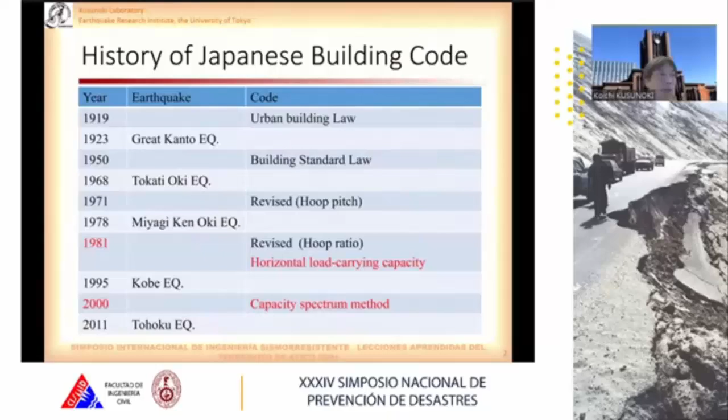But in year 2000, we added another option for the structural calculation, which is called the capacity spectrum method, which can predict the response of the structure explicitly for structural design. This is the basic concept of the capacity spectrum method.

Then at the same time, we can calculate the demand curve, which could be the code requirement. This demand curve shows us how much strength and how much deformability is needed for my building.

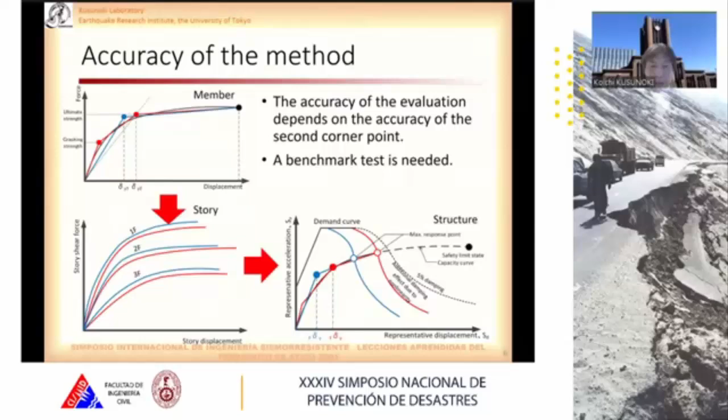And also we need a benchmark test to confirm the accuracy of the capacity spectrum method. So that's why the Ministry of Construction decided to launch a national big project starting in 2018 for 3 years, called the Building Standard Provision Promotion Project.

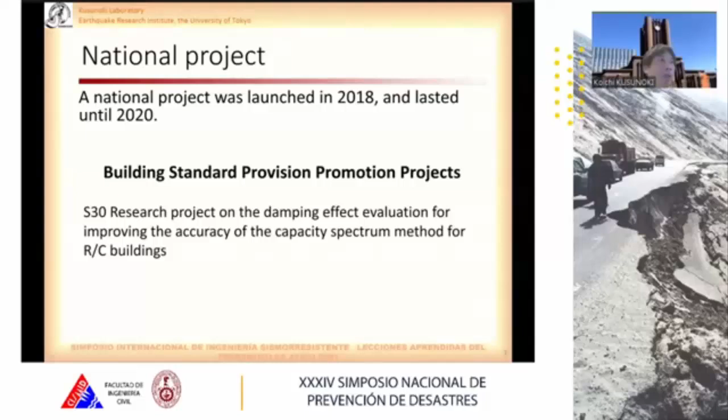Now the Ministry of Construction has a certain budget to conduct this kind of project every year. The number of the project is S30 - S means structural issue. The title of the project was a research project on the damping effect evaluation for improving the accuracy of the capacity spectrum method for reinforced concrete structure. It's a quite long name, but anyway, this was the official name of the project.

Then the activities of the project were to develop a new function to evaluate the second corner point of the reinforced concrete members. Then we started developing the database of the experimental tests.

Then we found that this kind of very deep depth and very narrow width columns cannot be found in the database, but this shape of column is nowadays quite common in Japan. So we decided to conduct some additional experimental tests with this kind of columns.

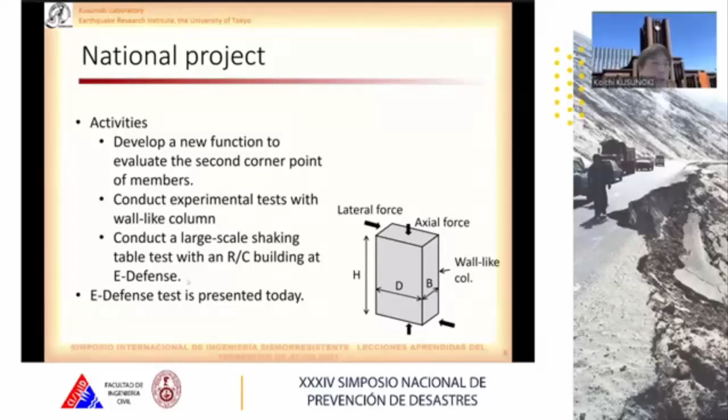Then finally, we conducted a large-scale shaking table test at E-Defense, which I would like to talk about today. Since the project is quite big, the research group is also quite big.

The PI from the academic field was Professor Teshigawara, an ex-BRI researcher. He has now retired from Nagoya University, and right now he is a professor at Chubu University. Then I'm here, and we have some researchers from BRI as well.

Because the project itself is quite big, we asked so many people to join and conduct other research with the same specimen. We decided to instrument some sensors to develop a structural health monitoring system. This subgroup consists of ERI, BRI, and some other private companies.

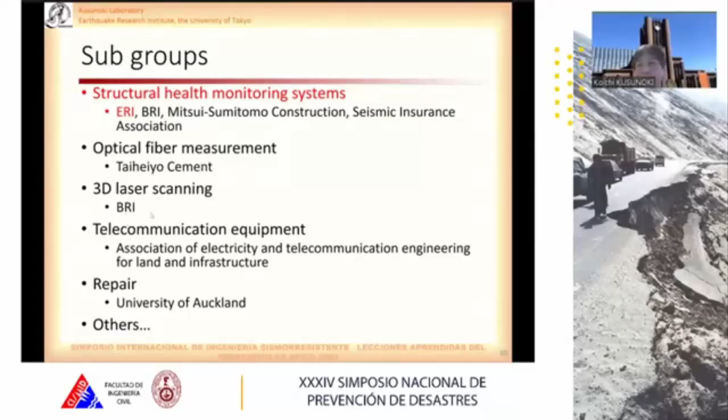We also asked a company to develop an optical fiber measurement system. BRI conducted 3D laser scanning of the whole structure, and so on.

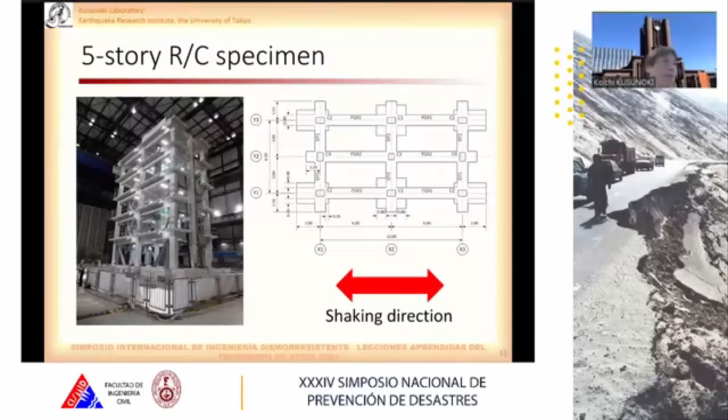So this is a specimen, almost full scale. The shaking direction is just one way, in the two-span direction. This Y direction was not shaken. It was a two-span, two-bay structure, and the span length was 6 meters.

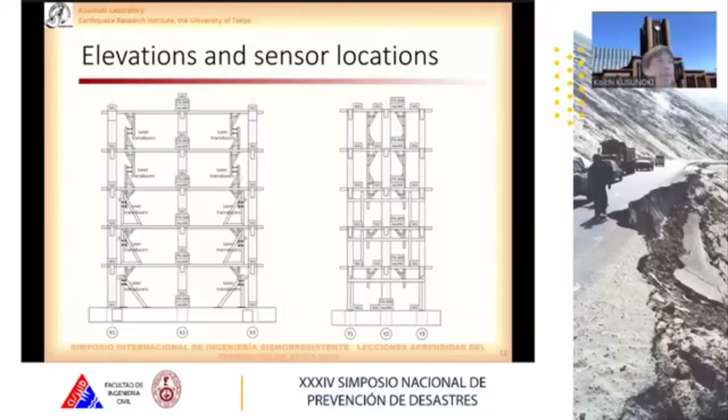Then this is the elevation. Since we were not planning to shake the specimen in the Y direction, the span length of the Y direction was quite small. We put so many sensors and accelerometers at the center of the specimen, and also the corner of the specimen, and also applied laser transducers to measure the interstory drifts, like this.

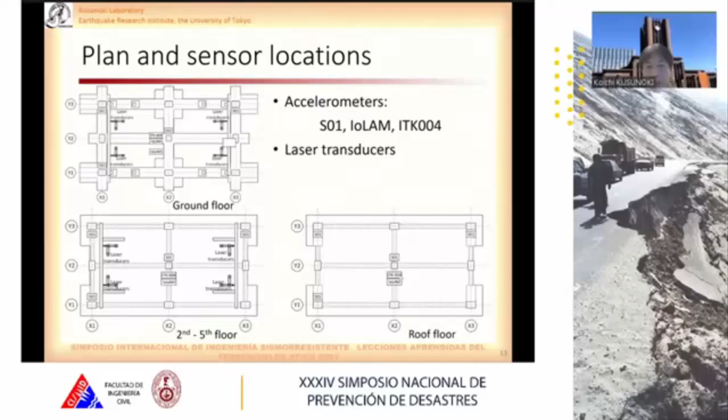One is quite high accurate sensor. Then one is quite low accurate, but quite inexpensive. It costs only $60 for 3 directions. It's quite cheap. So we put several sensors to confirm what accuracy is required for the structural health monitoring system.

For example, this one, you can see the difference of the sensors. S01 was provided by the E-Defense facility. This could be the highest accuracy, and the measurable range is quite wide. The second one is intermediate. Then this one is the cheapest.

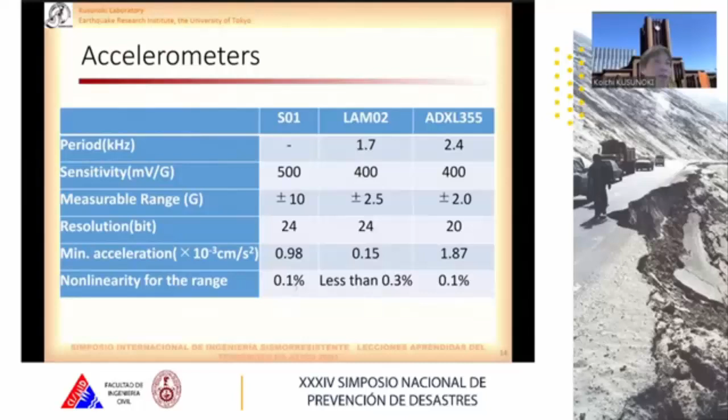Then you can see the minimum measurable acceleration. It looks quite high. Oh, actually this one was the best one. You see the accuracy is the highest here, but the linearity, non-linearity, is a little bit larger than S01. We applied anyway 3 different sensors.

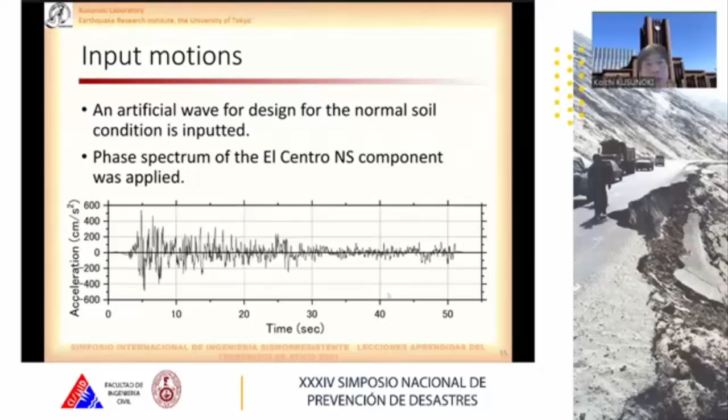So this is the input motion. We decided to input this wave, which is the artificial wave usually applied for structural design in a practical field. The phase spectrum was El Centro NS component. Then it lasted, the duration was about 1 minute.

So this figure shows the response acceleration of the input motions. Firstly, we inputted 60% of the code requirement to see the behavior in the elastic stage. Then we inputted the code requirement level and increased up to 125%. Then we inputted this level again to see what will happen during the possible maximum aftershock.

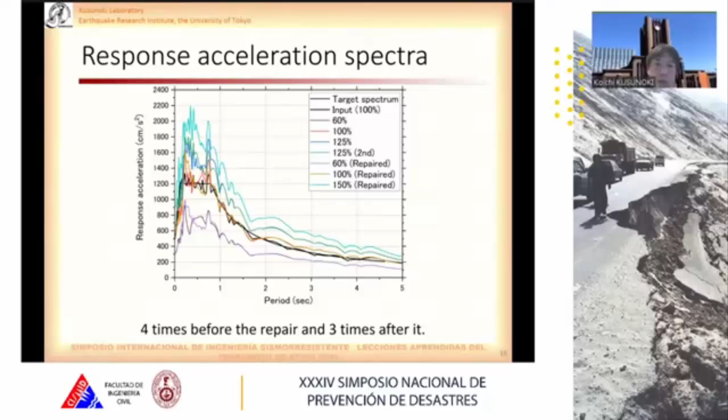Then after this test, we retrofitted, actually repaired the specimen. Then we shook it again, like this. So we inputted input motions 1 through 7. Here you can see the spectrum of the code requirement. Then for the 100% level, the response acceleration agreed reasonably with the code requirement.

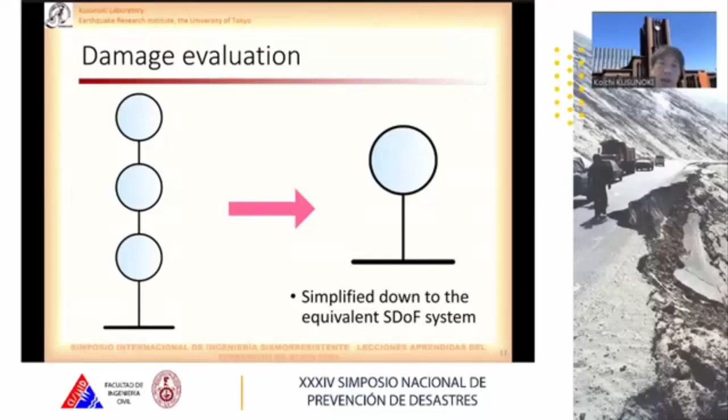So how to evaluate the damage? We decided to apply exactly the same as the capacity spectrum method, which is an option of the building code, added in the year 2000.

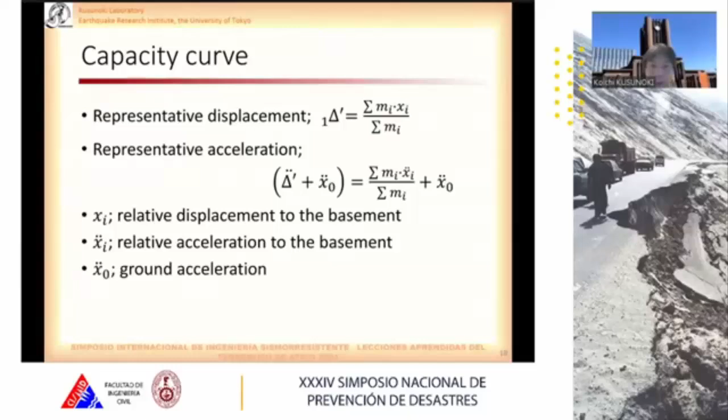So here you can see the functions to calculate how to simplify down to the single degree of freedom system from the multi-degree of freedom system. That's quite an easy function to calculate the response of the single degree of freedom system. I don't want to touch on these functions in detail, but anyway, I would like to say the simplification is quite easy.

Then with a measured acceleration, we can calculate the capacity curve directly from the measured acceleration, but only up to the maximum point, of course. We couldn't measure this region, only up to the maximum response point. So we need to predict the behavior after the maximum point, like this.

Then with the mode shape, measured during the shaking, and the safety limit state previously decided before the test, we can evaluate the damage level of the building like this. In this case, the damage level is evaluated as level 3.

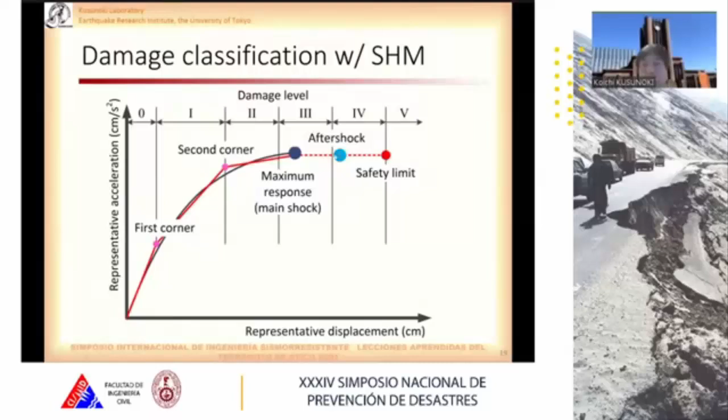Then during the aftershock, we can predict the response. We can also predict the damage level during the possible maximum aftershock, which is assumed to be the same as the main shock.

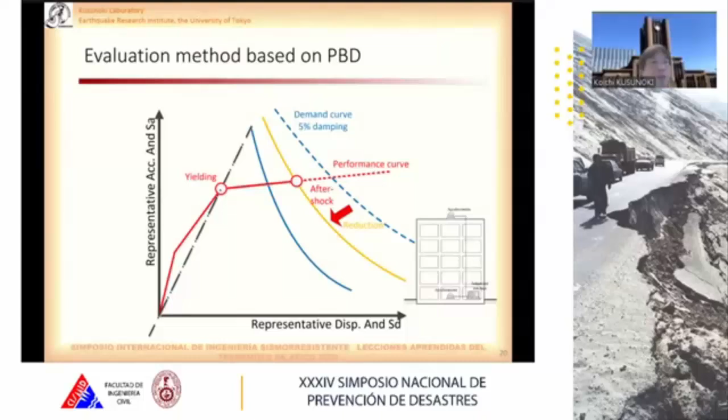So in order to predict the response during the aftershock, we should develop a new function to evaluate the additional damping effect for the aftershock, like this yellow curve. For that purpose, we conducted a bunch of numerical simulations, about 50,000 cases, to develop the function for the aftershock.

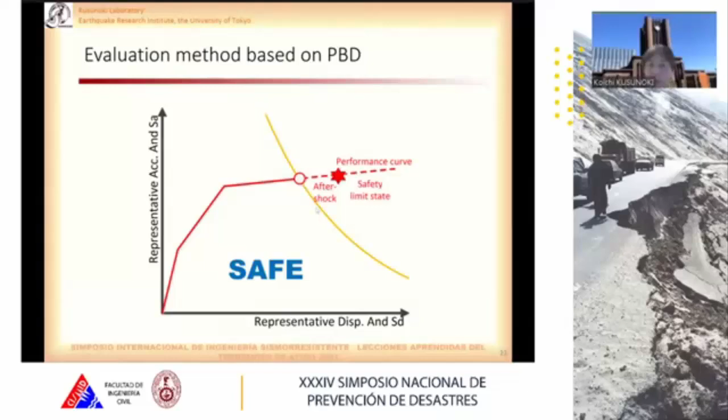Then if the predicted maximum response point exceeds the safety limit state, the system will say unsafe. If the predicted response is before the safety limit state, the system will say your building is safe, even for the aftershock.

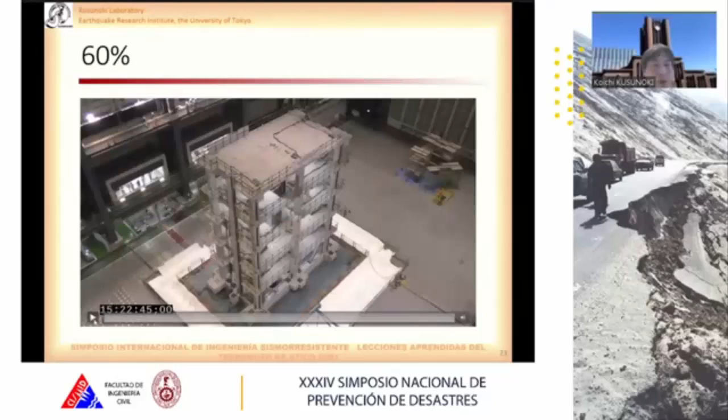So in this specimen, the system was installed. We did nothing. The system automatically detected the shaking, started the calculation, then finally the system shows us the result. Here I would like to play the movie during the 60% input motion, but I'm afraid the internet connection may not allow me to show this movie smoothly.

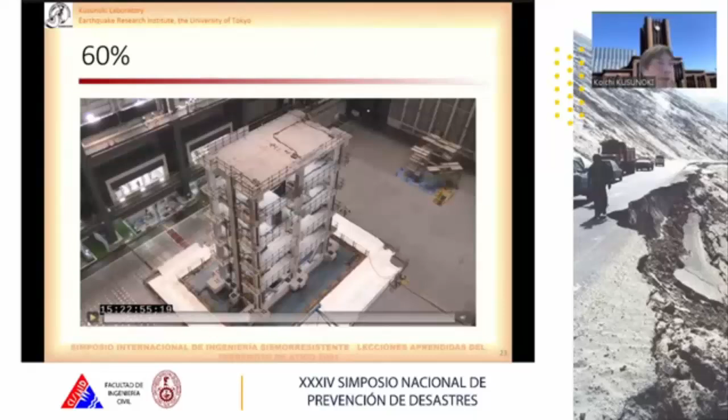Sorry, probably because of the internet connection, the movie doesn't work. It seems just frozen, so unfortunately I cannot play the movie. I needed to skip this slide as well. I wanted to show how big the shaking was, but no way.

Because of the pandemic situation, this shaking table test was actually conducted last December, just between the emergency declaration in Japan. Because of the pandemic, unfortunately we couldn't invite researchers to observe the shaking table test. That's why the people looking at the specimen are quite few.

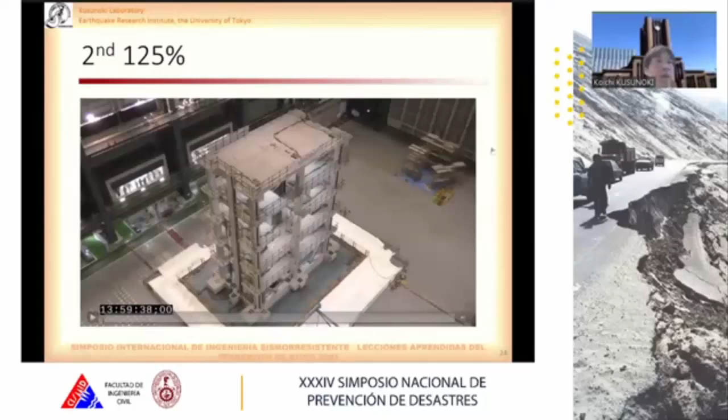It will never be approved by the owners to install the transducers. It's quite an obstacle for usage. So for practical or ordinary buildings, we must do everything with only accelerometers. So we apply some special technique to eliminate the effect of noise.

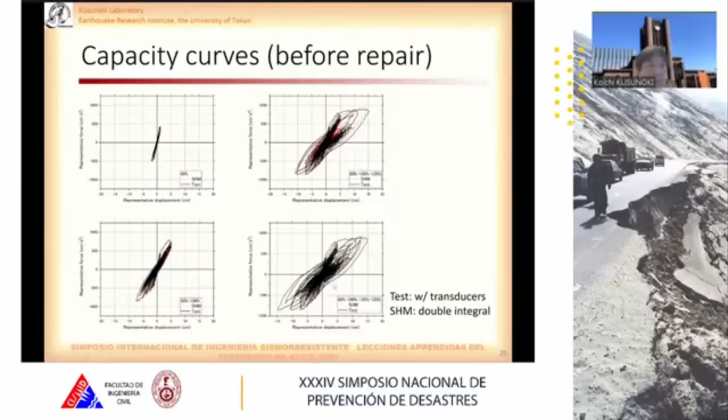Here you can see the difference, how different they are. We can say the calculated displacement from the measured acceleration reasonably agreed very well with the transducer result, from the quite elastic range to the very large nonlinear range, the calculated displacement agreed very well.

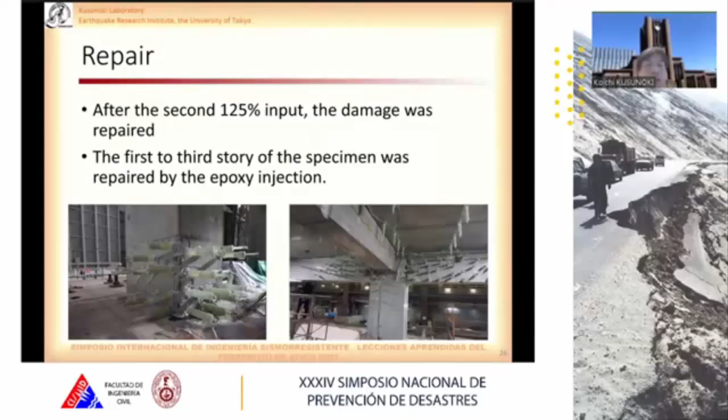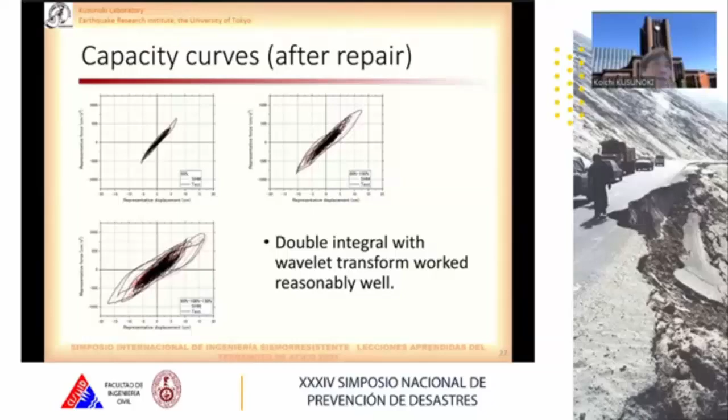But anyway, you can see the double integral with a wavelet. The wavelet transform is a technique we used to eliminate the noise component. The structural health monitoring result agreed very well with the laser transducer result. We are confident that our system can be applied to actual buildings.

So this is the effect of repair, the backbone curve of the capacity curves during the 60% input motion. We expected the specimen to remain linear during the 60% input motion. Then you can see the stiffness is about 30% of the original stiffness.

So 3 days was not enough to repair the specimen perfectly. 30% repair is quite a low rate, but unfortunately this time it was 30%.

So this is the backbone curve of the capacity curve for all input motions. The black line shows before the repair, then the red curve shows after the repair. For both conditions, we obtained quite smooth capacity curves successfully.

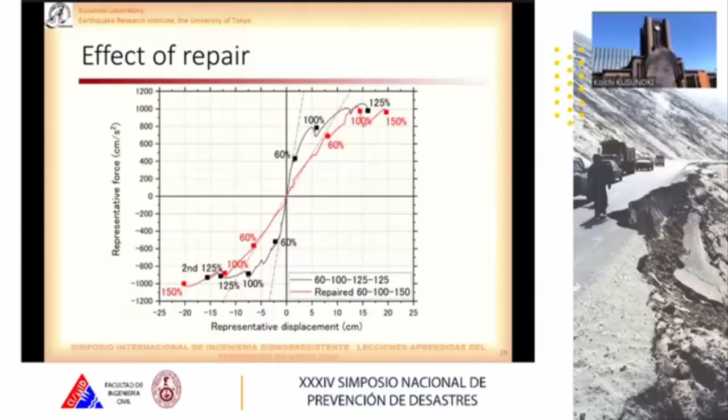So somehow the crack was repaired, filled with injection. That's why the damping became a little bit smaller, but the stiffness didn't come back to the original stiffness.

So this figure shows the predicted safety limit state. As I told you, the safety limit state was predicted based on the defined ultimate interstory drift angle, which was 2% for this specimen, and the measured mode shape.

For example, during the 60% input motion, the maximum response point was around here, somewhere around here. Yes, here. Then we couldn't predict how the specimen would go after this point because there is no measured data.

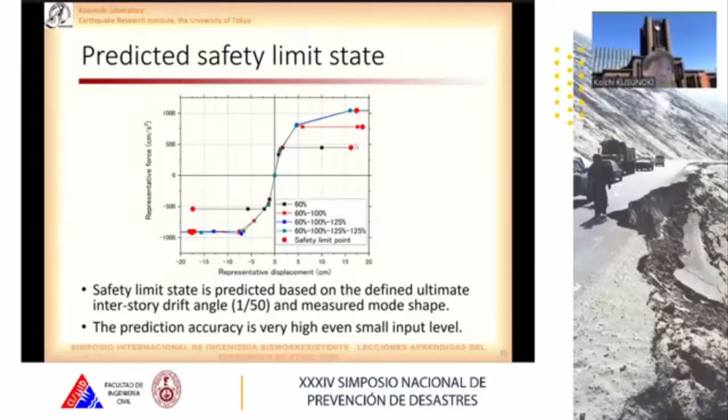agreed quite well with other input motions. So for the much stronger input motion, of course the specimen entered the nonlinear region. Then finally the maximum response was quite close to the safety limit state. But the predicted displacements were almost the same.

So fortunately the maximum response didn't exceed the safety limit state. So the damage level was evaluated as level 4 because it's before the safety limit state.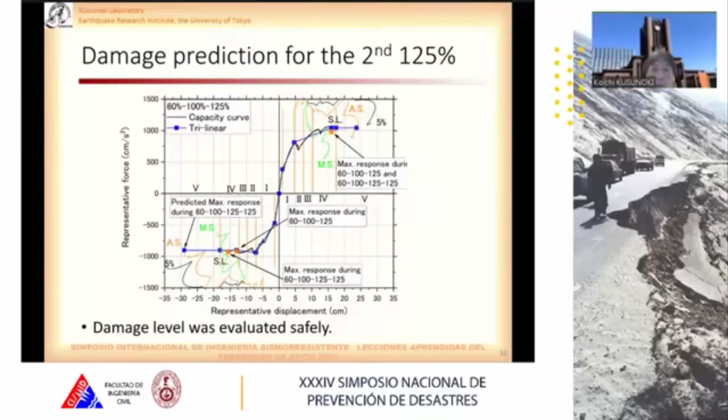Then for the positive direction, the maximum displacement for the second input was smaller than the first input because the whole specimen shifted to the negative direction. Then the maximum response in the negative direction was here. So fortunately the specimen was standing, but we can say that our system predicted for the safer side.

So probably the time is almost over. So I would like to go quickly.

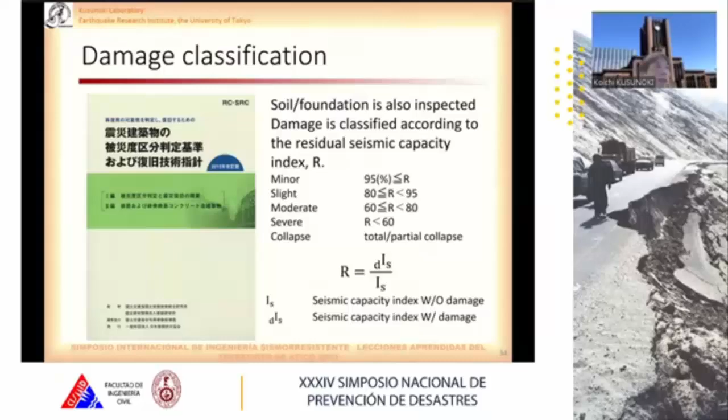So nowadays we have the damage classification method as a standard in Japan, but it's based on visual inspection. And also we have an earthquake insurance system. For this insurance system, an inspector will visit your building to evaluate the damage of your structure, then they will decide how much premium will be paid according to the damage.

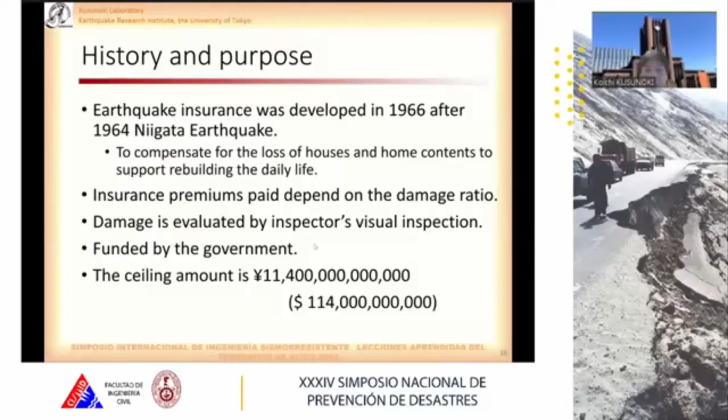So, for example, this insurance system was developed after the 1964 Niigata earthquake. Then there's a ceiling, because this insurance is funded by the central government, so the government set the ceiling amount. The amount is quite huge, but anyway the government will not pay more than this amount.

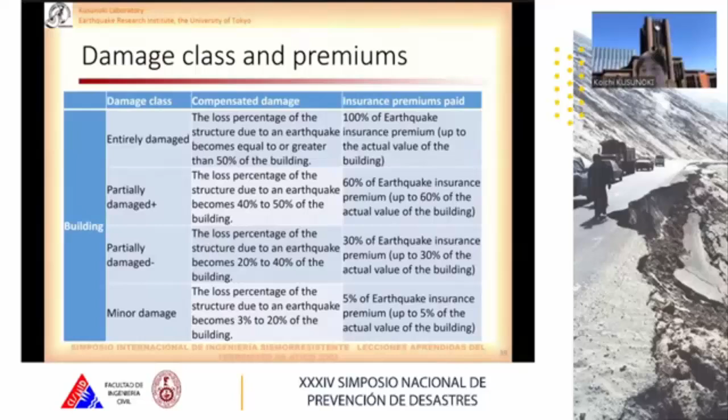Then the way to evaluate the damage is quite similar but a little bit different from the damage classification. Both are based on visual inspection. Then I would like to skip ahead.

Then for our specimen, we asked an inspector for the earthquake insurance to come and do the inspection with our specimen. And also we conducted the damage classification based on the standard, which is a visual inspection.

Then now you can see the three different methods: structural health monitoring, ordinary damage classification, and earthquake insurance. So you can see the three different methods gave us almost the same damage classes. They agreed reasonably well.

For the 60% input motion, since we didn't stop the hydraulic oil pump system, it's not allowed to get closer to the specimen. That's why the visual inspection was not conducted after the 60% input motion. But of course, with the structural health monitoring system, the damage can be evaluated automatically without any visual inspection.

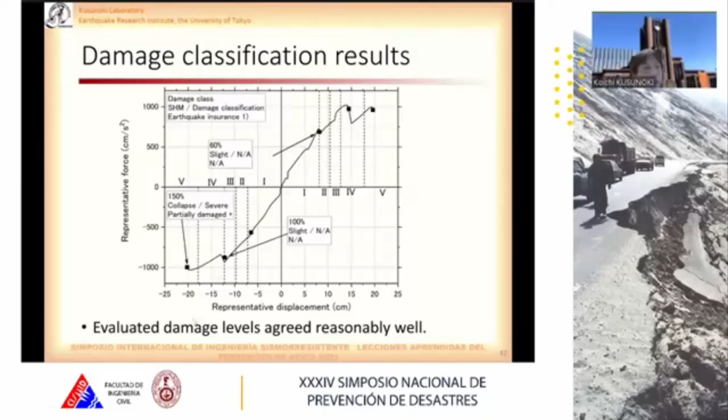This is the result during and after the repaired specimen. So we shook the specimen in just one day, so we could conduct a visual inspection only after the shaking, for this point. But all methods say collapse or severely damaged. So again, the evaluated damage levels agreed very well among the three different methods.

So this is the conclusion. A large-scale shaking table test was conducted successfully -- always stressful when we conduct such a big shaking test, but fortunately we succeeded. Then the capacity curves can be derived from the measured acceleration.

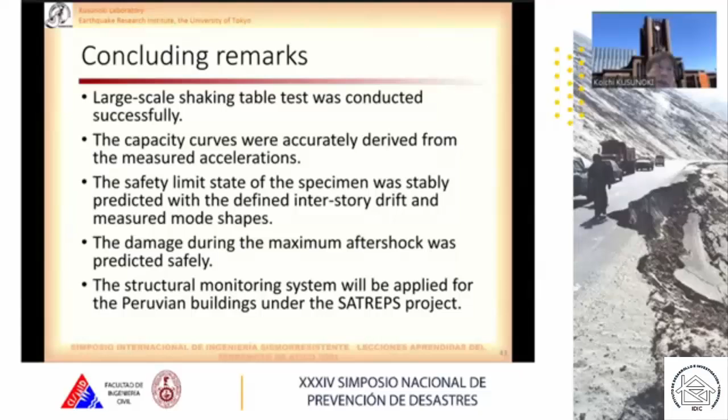Then the safety limit state can be predicted with the defined interstory drift angle. And also the damage level during the aftershock can be predicted safely, and the evaluation result agreed very well with conventional visual inspection-based evaluation methods.